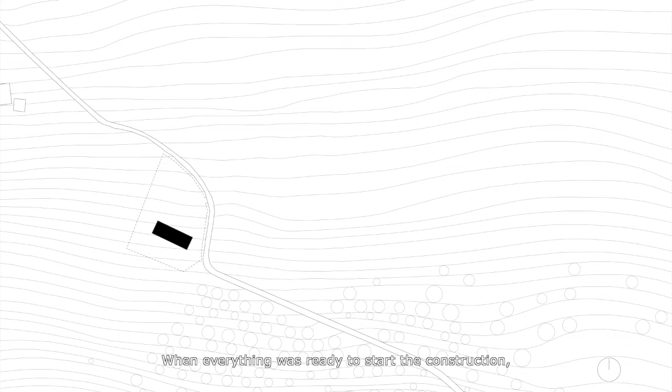Another building which concerns the topographic path is my ark, my own house, whose history is quite crazy. Everything started from finding a beautiful plot of land on the hillside of Równica mountain, and then I started working on the project. When everything was ready to start construction, a building permit was obtained and the construction took off. Annoyingly, there were a series of landslips in the region at that time, a phenomenon unknown so far on that scale. My area was not in danger, but I still kept it in mind.

Then I asked my constructor, what can I do? He told me, you can minimize interference in the soil as much as possible, but how to do it when the retaining walls of my first house were in the soil at 22 meters? Then I asked my wife, what would you say if we changed the house a bit? She asked, how much? I told her, completely. She asked if I was joking because I had been designing this house for 2 years and then all of a sudden I wanted to change it. How long was I going to take? I said, listen, 3 days so that the construction crew don't run away.

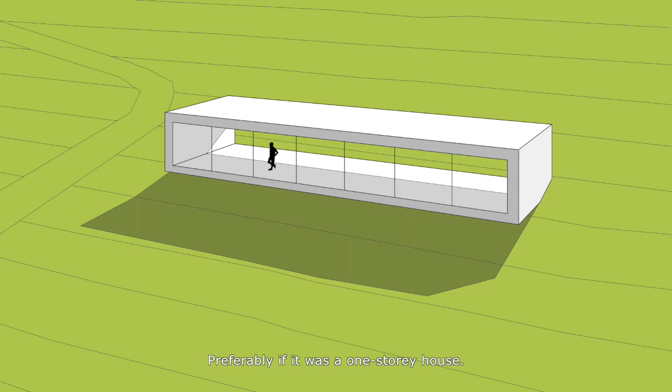I had to reset myself and remember why we actually bought this plot, for the magnificent view. So the house had to be framed for the landscape. We should achieve some view from each room, preferably if it was a one-story house. My wife had already wanted a one-story house, she was afraid of the wilderness around.

Then I thought, okay, what if I slightly push up this ground floor away from the slope so that only one face of the house was in direct contact with the slope? Then the remaining part of the house containing the bedrooms would become an actual first floor. Then you can sleep safely.

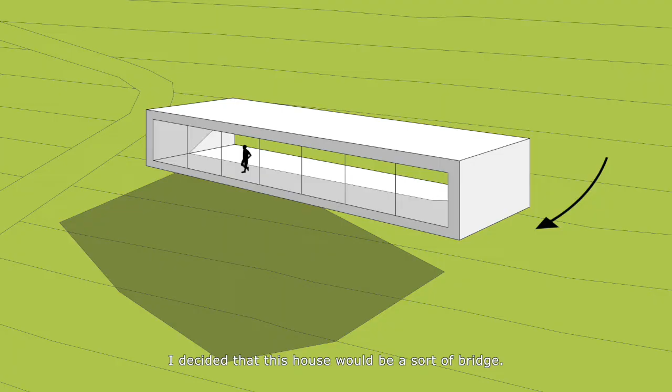Another very important step was the sense of security when it comes to possible landslips. Not to violate the land, so that the house is in harmony with nature, I decided that this house would be a sort of bridge. I will support it only on 3 walls, on triangular trusses, under which water can flow smoothly.

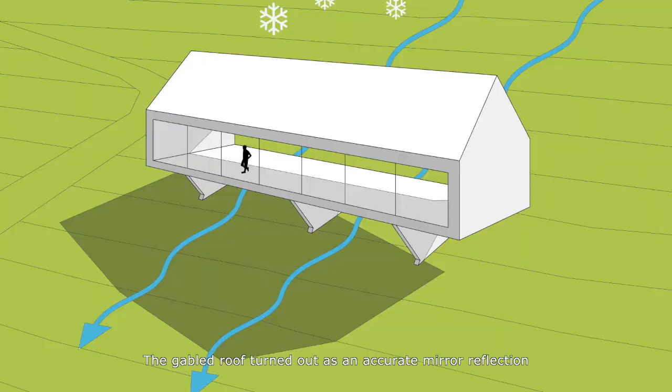It was obvious to put there a gable roof because of the mountain climate and local planning law. And the last step, it still missed some technical space. Finally, we had to close the shape in order to stabilize the firmness of the building. The gabled roof turned out as an accurate mirror reflection of the foundation walls down below, giving the impression of an inverted roof. After cutting the end walls, the construction gained quite an interesting appearance and the whole thing started resembling an ark. That's why it is called Konieczny's Ark.

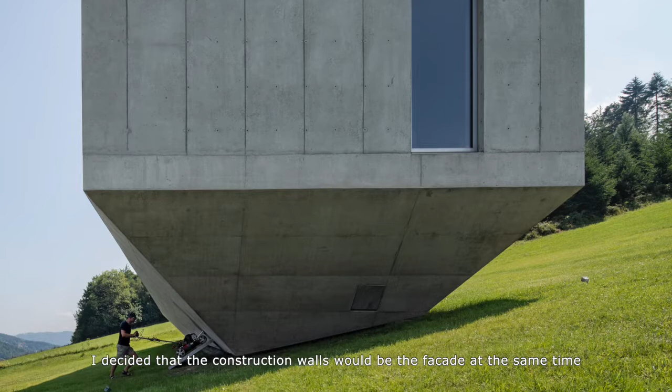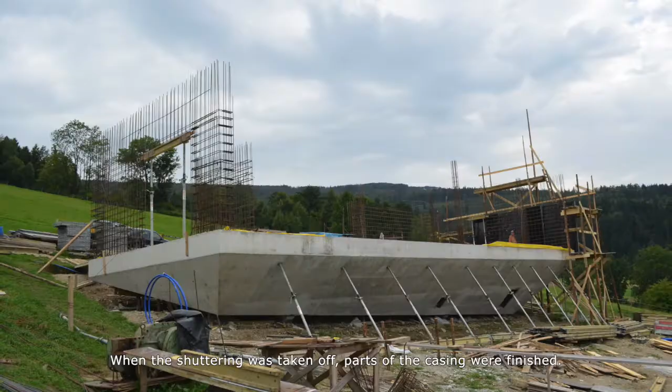Let's focus briefly on technology, as it is crucial here. In order to simplify the building and lower the cost, I decided that the construction walls would be the facade at the same time, and I would put insulation inside. Take a look, you can see a shuttered casing of the ark here. When concrete was delivered, the terraces were done at once. When the shuttering was taken off, parts of the casings were finished. You can see the reinforcement which is about to turn into facade.

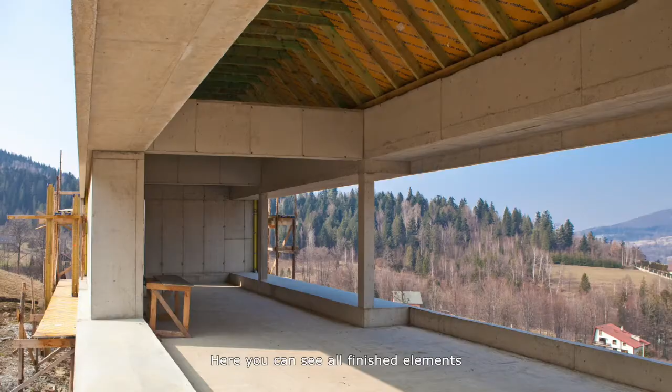Just a roof is made of wood and second-hand shuttering boards so that nothing is wasted. It is covered with TPO membrane whose color resembles concrete. Here you can see all finished elements such as walls, ceiling and pocket in the floor, which was to be filled with insulation. This led to an interesting idea in accordance with construction physics.

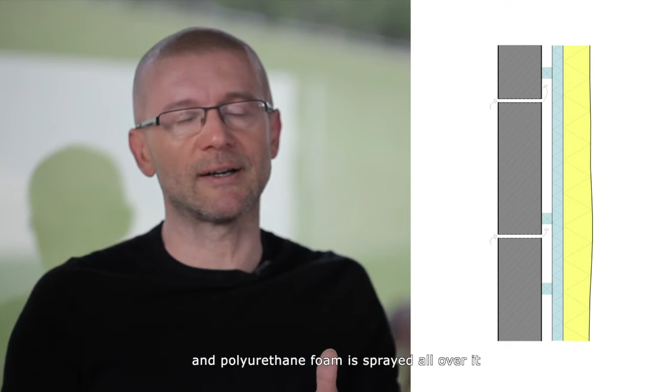The insulation was moved 5 centimeters away from the walls to enable ventilation. Take a look at how it was made. There are small blocks of styrodur attached to the inside of the walls. Styrodur boards are screwed to them, and polyurethane foam is sprayed all over it, which is completely airtight.

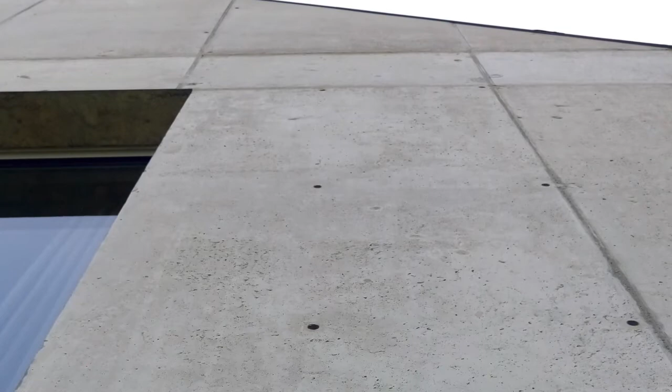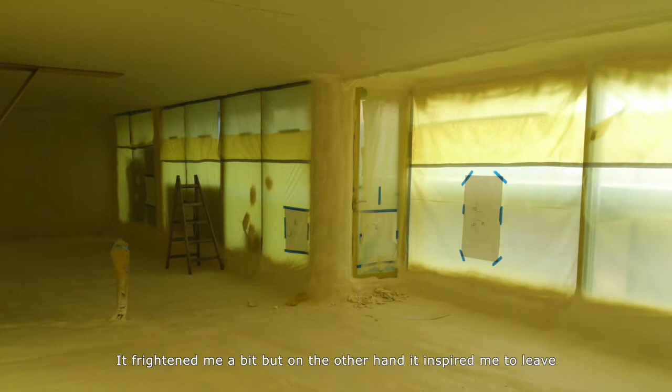You can see small holes that remained after shuttering. They are used to ventilate the walls. You can see attached foamed boards which look like a salt cave. It frightened me a bit, but on the other hand, it inspired me to leave one of the boards uncovered

Painted to look nice and be cheap at the same time. Let's move to the most important thing now. The house was supposed to be a frame for the view. However, it opens onto the northeastern side fully, and only partly from the south.

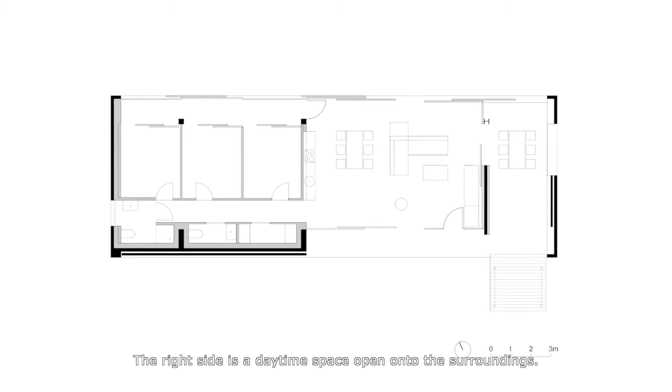Why is it so? The right side is a daytime space open onto the surroundings. On the left it was about the sense of security, and this is why there are bedrooms at this safe height. It's the view from the inside of the house. It is just a background for the view.

On the left, the glass was moved to the edge of the building to enjoy the skyline of the mountains. From the south, they are pulled back, which creates a roofed terrace and protects from warming up the inside when it's hot. When the weather gets worse, the terrace can be covered with glass panels and we can continue using it. The interiors are very simple and minimalist, local wood and stainless steel, which optically expands these small rooms.

It was also applied in the hall connecting the living room with bedrooms, as it is the only place where the sunlight comes in from the west. It works as a periscope.

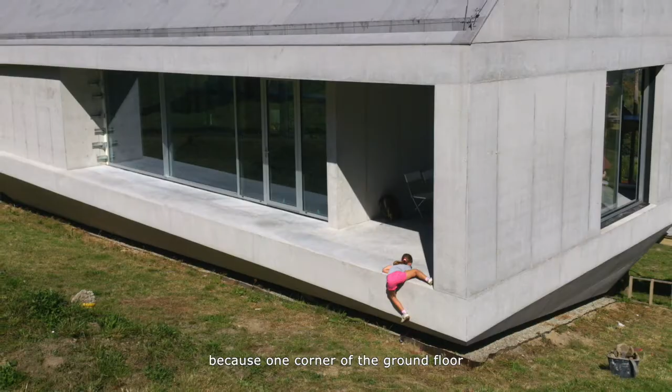I was wondering if I should install extra shutters from the south in case of a heat wave. My wife asked for them as well, for a sense of security. I also had to think about an entry because one corner of the ground floor comes in contact with a hillside surface and there is a difference of about 1 meter in height.

The idea was to apply a shutter, which is also a drawbridge. It connects the inside with the surroundings and completely changes the house when open. Then the whole surrounding and the inside become one space.

When we look at the house at night, we can see light emerging from its bottom. It may seem to be illuminated. The truth is that the light comes from utility rooms because there are cracks where water flows. It is protected with a net which stops snakes from coming in.

There I keep wood, household equipment and lawn mowers. To get out of there easily, another drawbridge was applied.

By the way, at some point I realized that the house and the garden are a part of the mountain, a part of the hillside. I became aware that the best project of the garden would be no project at all. The best path leading to the house would be just a couple of stones, and the fence would be a temporary electric fence or lack of it.

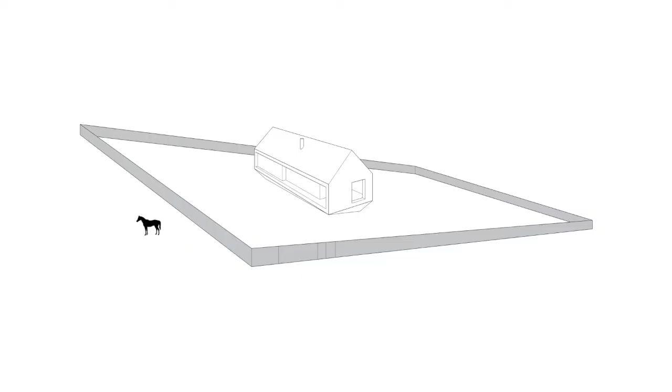The animals which pasture around cut the grass perfectly. So, abandoning the fence and moving it to the outline of the building resulted in the general accessibility of the plot, but also in an interesting symbiosis between residents and animals.

And importantly, I also wanted to have some lighting on the plot, which wouldn't violate its naturalness. That's why the casing of the ark became illuminated. It is a reflector and the whole house is a lamp.

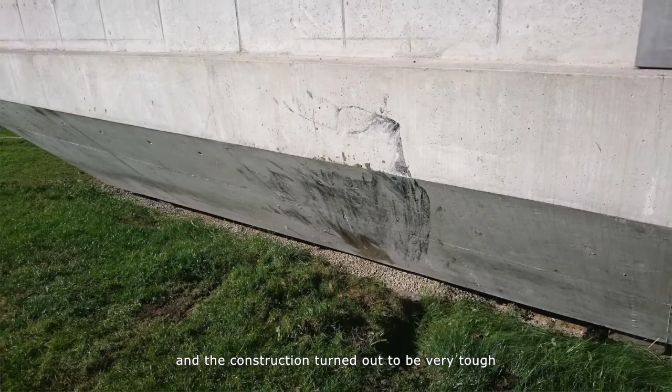The ark's casing saved the lives of a rally crew once. Thanks to its shape, nothing bad happened to the participants, and the construction turned out to be very tough, although I hadn't anticipated a collision with a jeep.

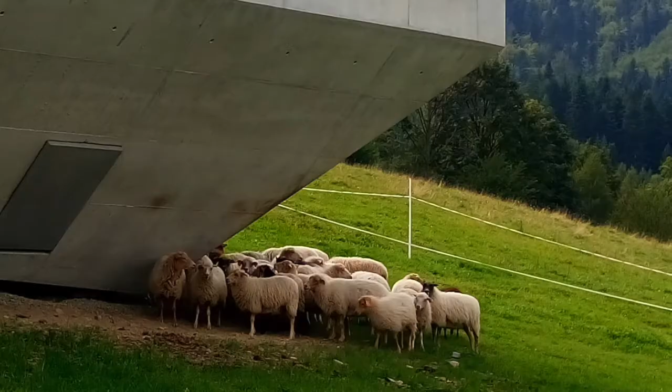Another situation sounds unbelievable, but reflects the everyday life of the forest. Animals living on the pasture treat the ark, and to be more precise, the space under its casing, as a home. They can find shelter from the wind and rain, and the edges of the ark are used for scratching.

It is amazing. I had never thought of it when the name was invented. The animals added another meaning to the word ark by living here with us in harmony.